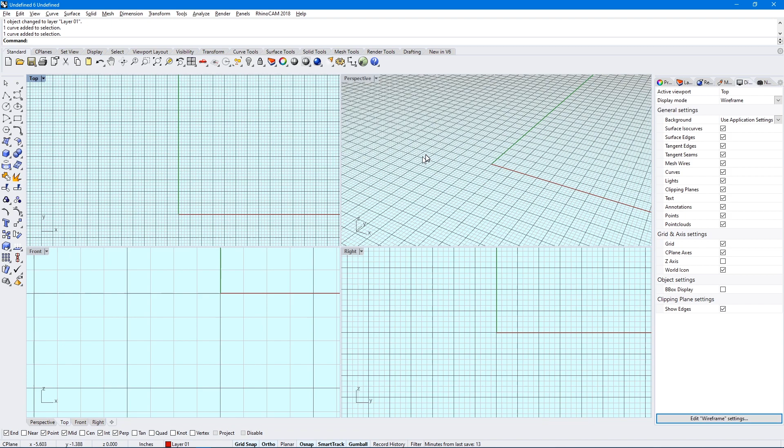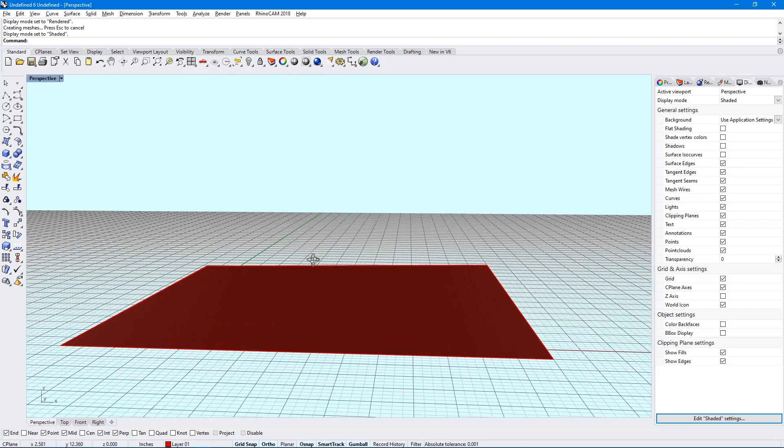So planar, what does planar mean? Planar just means that something is in the same plane as something else. So a plane can be any surface that is totally flat. Here we're making, in shaded mode, a surface that is totally flat. It has zero thickness, and right now it is in a single plane. If it wasn't in a single plane, it would look like this.

We're going to turn the points on this surface, and we're going to move this point vertical. You can see this isn't planar anymore. It's not totally flat. So when it is totally flat, it's planar.

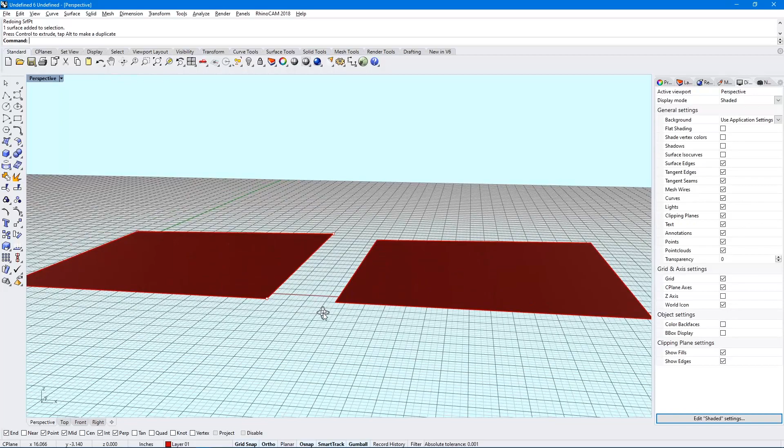When things are coplanar, it means that there are two things that are in the same exact plane as each other. So we'll take this, move it with the gumball. Now these two things are in the same exact plane. If we look at them in the top view, you can't really tell.

If I move this one vertically and we look at it in the top view again, you'll see it looks exactly the same as it did before. Here they're in the same plane, here they're not on the same plane. I'm undoing, redoing — you can see there's no change here.

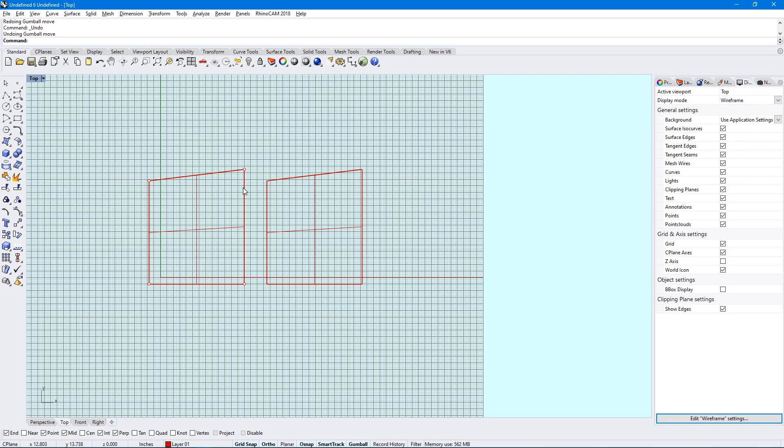However, if we go to the front view, you can see here things are not coplanar, but here things are coplanar — they're in the same exact plane. So that's what it means for something to be planar.

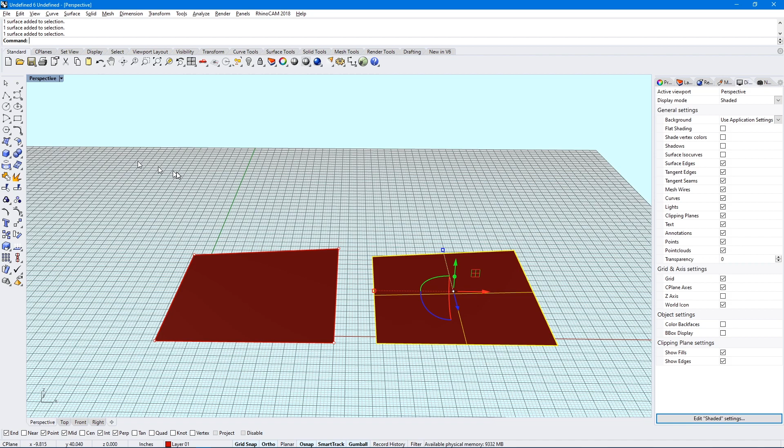So we have two things that are planar right now. We're going to add a few more of these surfaces in a few different places. We're just going to make a rectangle over here. And there's a quick little command that's pretty useful for checking whether or not something's planar.

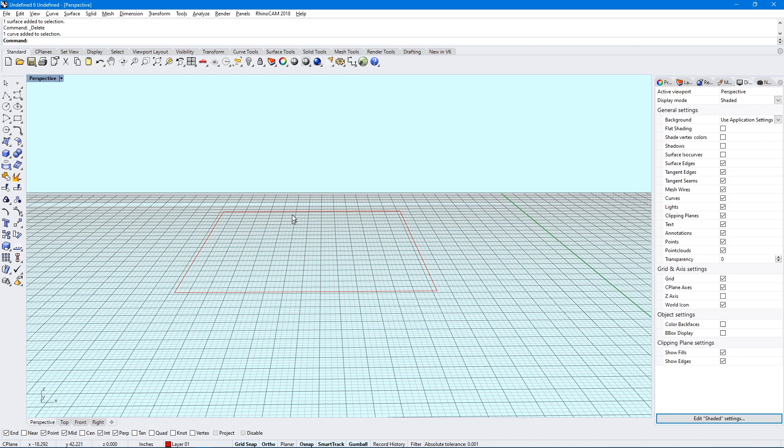Right now I have a rectangle that's a series of curves, and this rectangle, I would hope, is planar. If I click on it and type PlanarSrf, hit enter — if it makes a surface, that means it's planar. If it doesn't, that means one of the points on this rectangle is not on the same plane as the others.

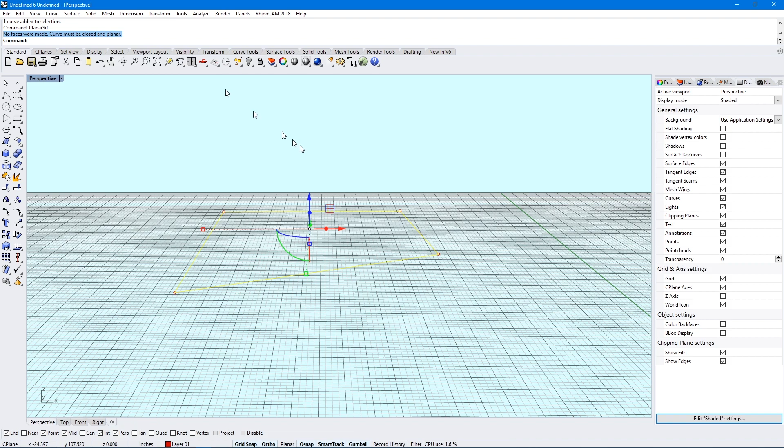So when I try and make a planar surface, it won't make it — it'll give me a command message. It says, no faces were made, curve must be closed and planar. So here we have a planar rectangle; turn it into a surface.

And we're going to make a few copies of this rectangle. Bam, one right there. And we're going to make one up here. We're going to move this guy over a little bit.

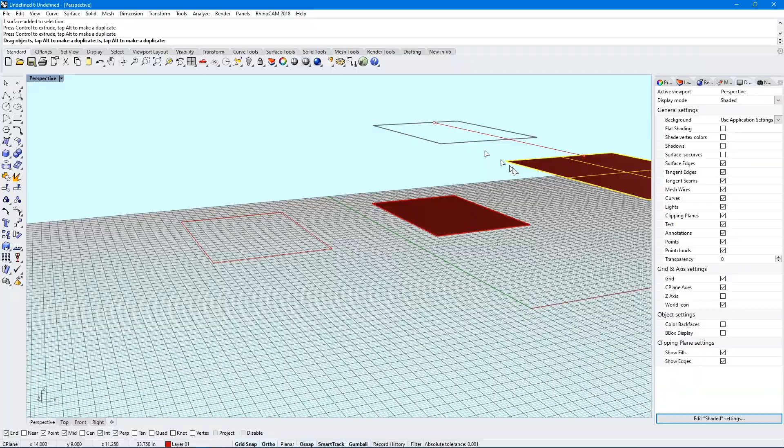So the planar modeling aid — what does this do? We're going to turn this surface back. The aid is down here at the status bar. If we click on the planar modeling aid and it's highlighted and bold, that means it's on. If it's not, that means it's off.

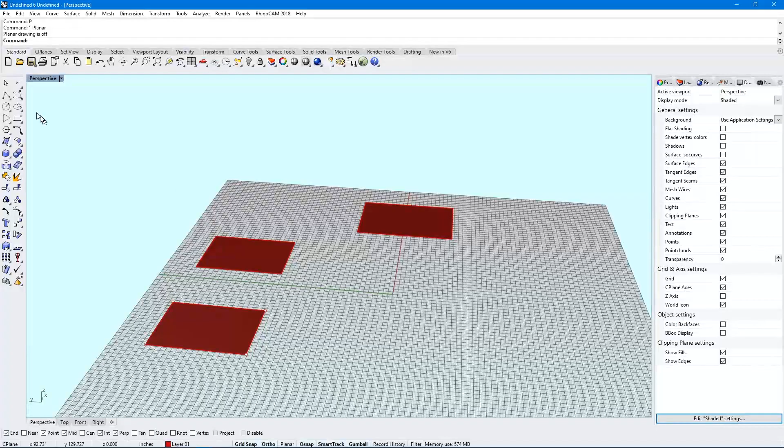A quick way to turn it on is you can type the letter P, hit enter, and you can see it says planar drawing is on, and it turns on down at the bottom. If you want to turn it off, you hit P, then hit enter again. So what this will do is when you're drawing, it'll keep things in the same plane. This happens automatically even when planar is off, but only at the C plane, which is the construction plane.

So if I just started drawing some random shape, this shape would be totally flat and planar at the construction plane, right? It's at the construction plane.

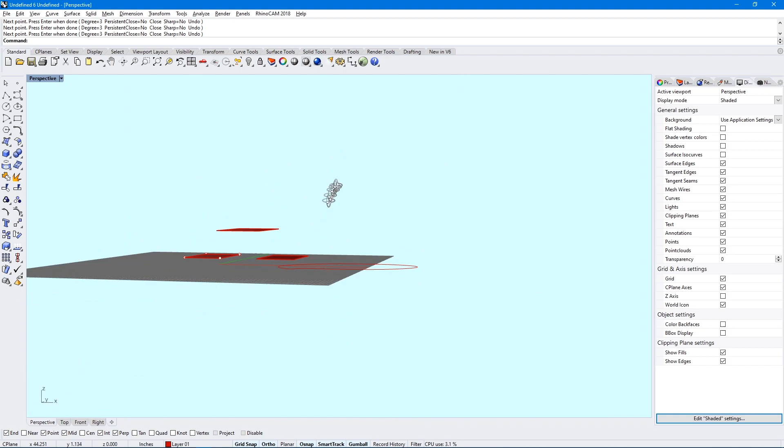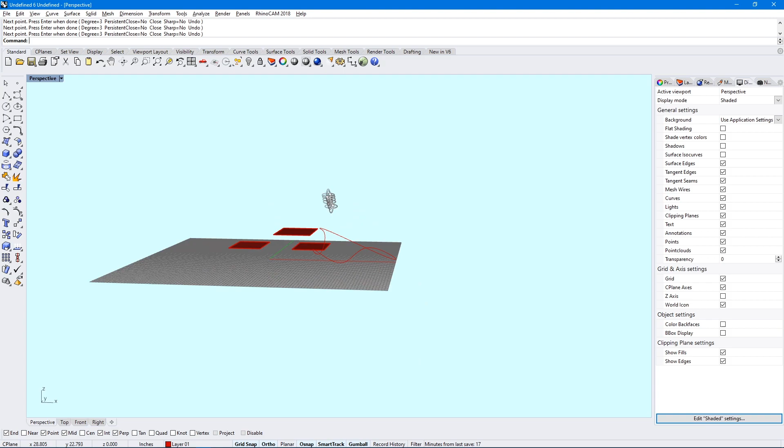However, if I tried that again, and my first point that I clicked was somewhere that wasn't on the construction plane, for example this corner up here which is higher than the construction plane, then the first curve, or first point, is all the way up here. But the rest of them are up and down everywhere, so they're not planar anymore.

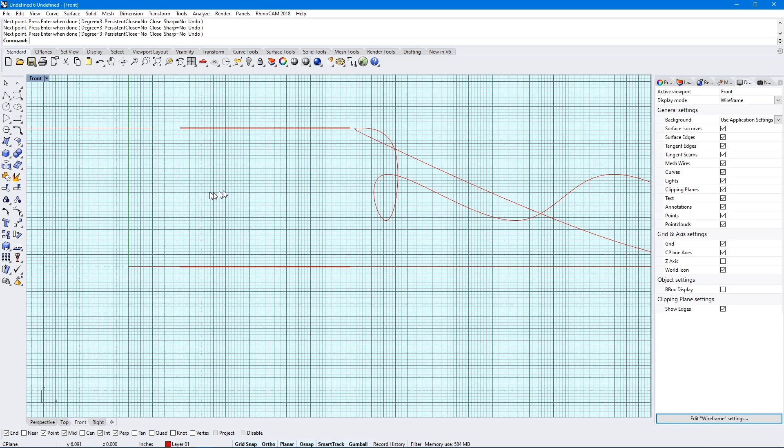Let's try that again with the planar command on. Click here, and we'll click in a few different places. Close that up. Now if we look at that curve, that's totally flat. With the planar modeling aid on, it makes something totally flat. With it off, it messes this up—not flat, not what I want it to be.

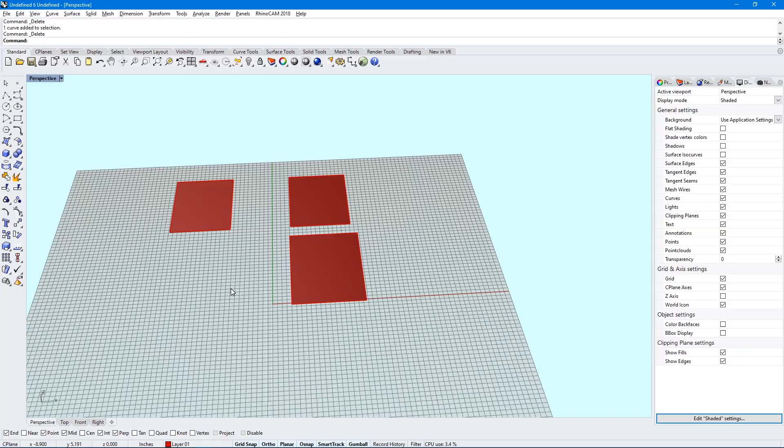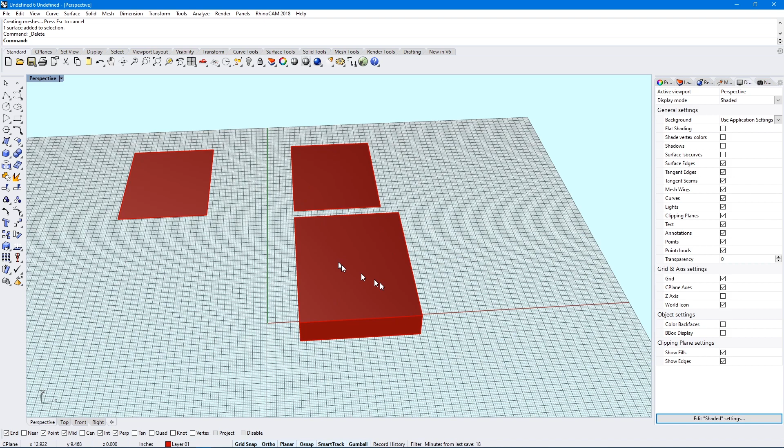So just for some context here, let's say I wanted to cut a weird shape out of this surface. We're going to extrude this, I don't know, 3 inches. So now I have this block, and let's say I wanted to cut a weird keyhole kind of shape out of the top of this block. Then what I want to do is draw that keyhole shape up here somewhere.

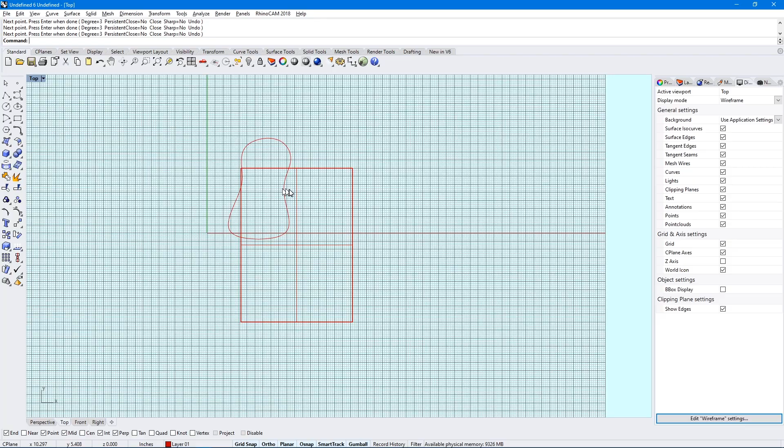So maybe, and I'm just going to freehand this—please excuse—that's kind of like a bean shape. But now, if I look at that, it's all the way up top on that surface, perfectly flat, right where I want it to be.

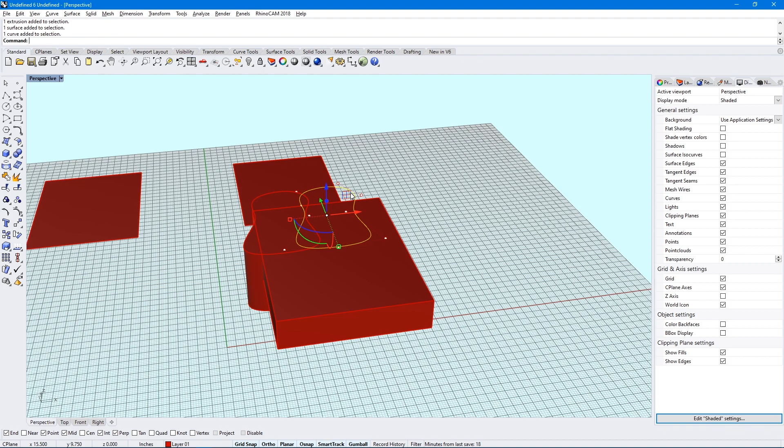So now I can take this, extrude this through there, put it in the right spot. Get rid of this, take that, put that in the right spot, and now we can cut this shape out of here. So we'll go ahead and do that.

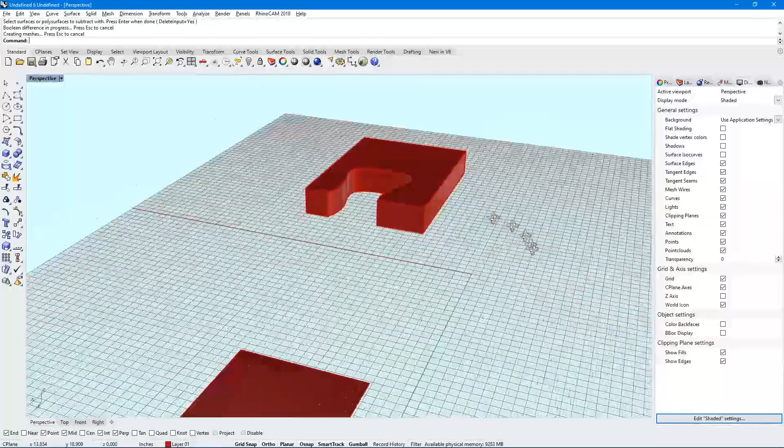So now I have that shape cut out of this block. If I didn't have the planar command on there, then what I would have had to do is draw it on the C-plane and then move my shape from here, move vertical from any of these points to there, then get it in the right spot.

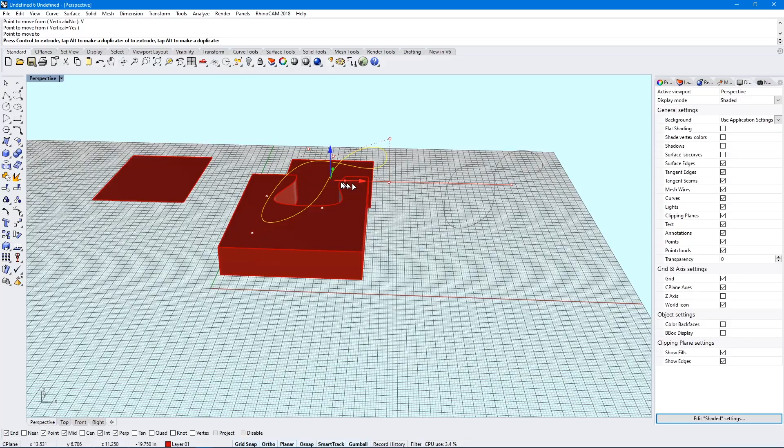And that's just a lot more steps. So planar is really useful in a few instances like this. We're going to move this to be at a kind of intermediary level—low, medium, high.

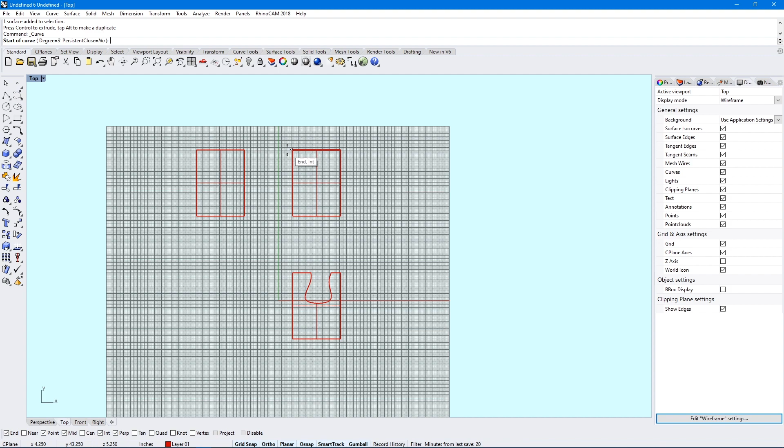If you start drawing something with the planar command on, it'll make something planar to whatever the first point you clicked is. So if I click there, it makes something on that level. If I click here, it'll make something on this level. And if I click here, it'll make something on this level.

So now if we look at this, we should have 3 different curves on 3 different levels, and they should all be planar, which is exactly what we have.

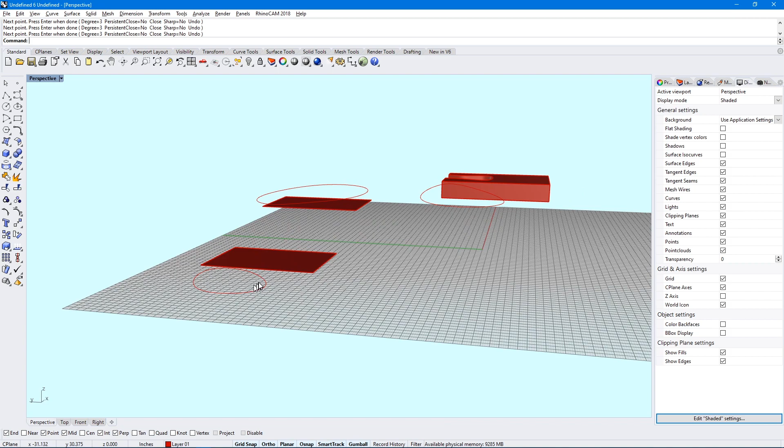Planar is really useful when you want things to be on the same plane or totally flat—you want to draw on top of something else. It's not useful if you want to draw in between objects.

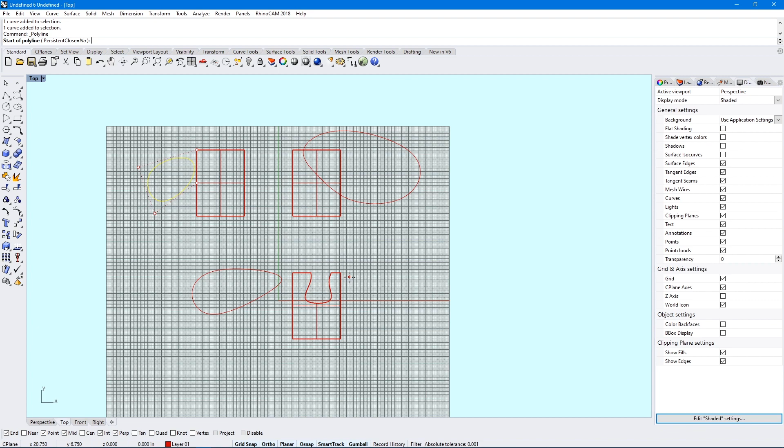So let's say I want it to go from here to there to there—I want to change levels. If I try and do this, because my Osnaps are on, it's making it happen. But this is not really one of the instances I want to have planar on.

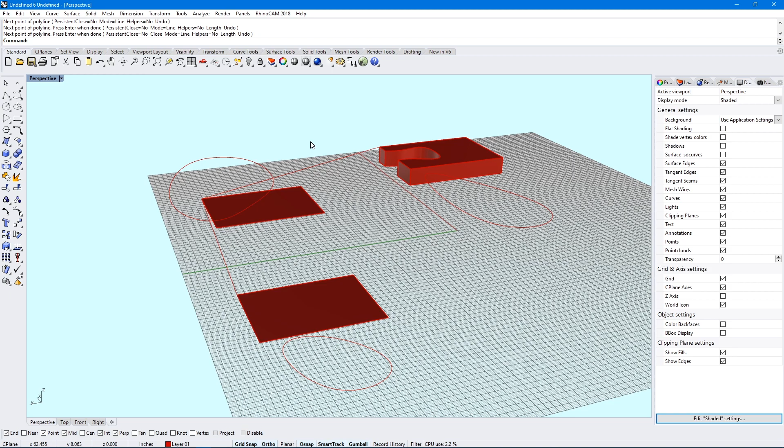In this kind of situation, if I wanted to change in between a bunch of levels, it's probably better for me to have planar off. That's pretty much it—that's how you can use the planar command in Rhino.